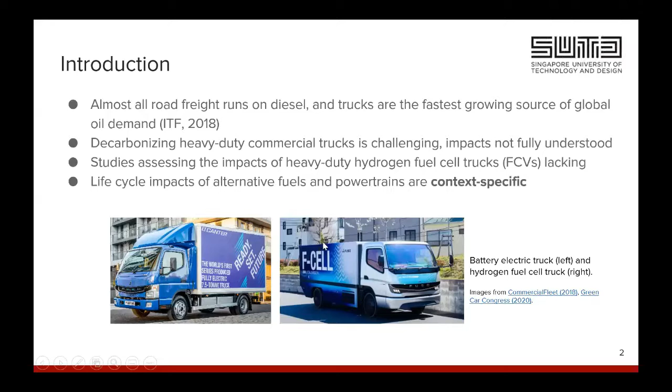I'm presenting this work, which is joint work with a colleague of mine, Lih Wei, and we wanted to look at the life cycle perspective of alternative powertrains for heavy-duty commercial vehicles, which are trucks. So we looked into a Singapore case study, and here's our results. Road freight runs mostly on diesel presently, and trucks are the fastest growing source of global oil demand. So we need to think about alternatives, and we also know that decarbonizing this group of vehicles would be more challenging. The impacts are not yet fully understood.

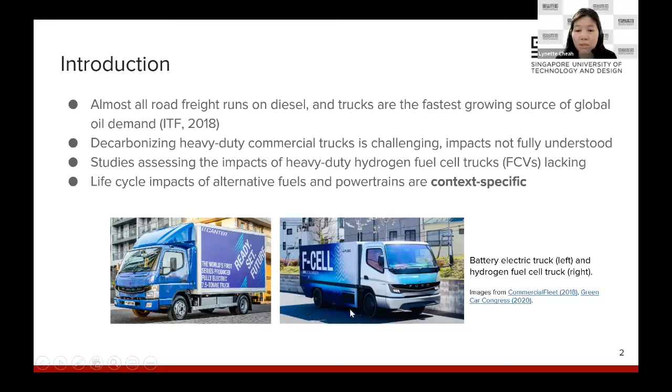So when we looked into the literature, we found a few studies, but those studying the impact of heavy-duty hydrogen fuel cell trucks seem to be lacking. And we also realized that in order to look at the life cycle impacts, every context differs a little bit. So that's why we focused on our case study of interest, which might be relevant in other cities as well. These images at the bottom show a battery electric truck on the left and a hydrogen fuel cell truck, which are some of the alternatives being considered now for these heavier vehicles.

So that's the burden associated with producing the fuel needed, be it diesel, electricity, or hydrogen. We'll be looking at the vehicle cycle, which concerns the embodied carbon in the materials used in the vehicles, assembling the vehicle, and then eventually using it, so the tank-to-wheel analysis. So this would have inputs if there's additional maintenance, or maybe battery replacements would also be accounted for in the

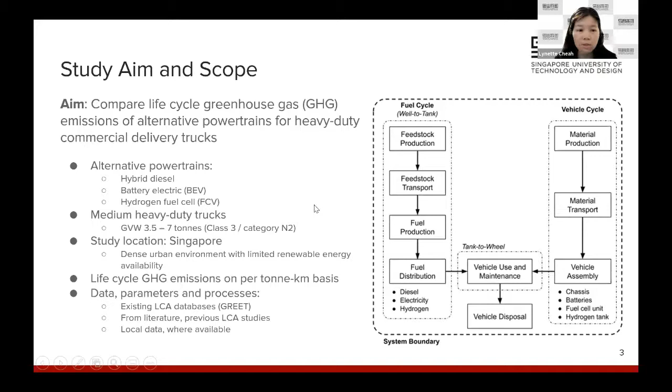vehicle use phase. The vehicle we're looking at, we call it a heavy goods vehicle in Singapore. I think it's more commonly known as a Class 3 vehicle in the US, or a Category N2 vehicle in the European Union. And we're looking at the city use of these sorts of trucks in a very dense urban environment. We'll be reporting the greenhouse gas emissions on a per ton kilometer basis. We'll use local data where available. If not, we'll be using existing lifecycle inventory databases like GREET or other available sources in the literature.

For the manufacturing and recycling, we use some of the emission factors available from the literature, and we account for key components like the vehicle body itself, the battery unit, fuel cell unit, or hydrogen tank. And then for replacements, there's some range of assumptions that we had to make. For the battery, we assume it lasts maybe 2,000 to 5,000 cycles, depending on the battery chemistry, the source of which is the California Air Resources Board. And the fuel cell units are going to last up to 19,000 hours.

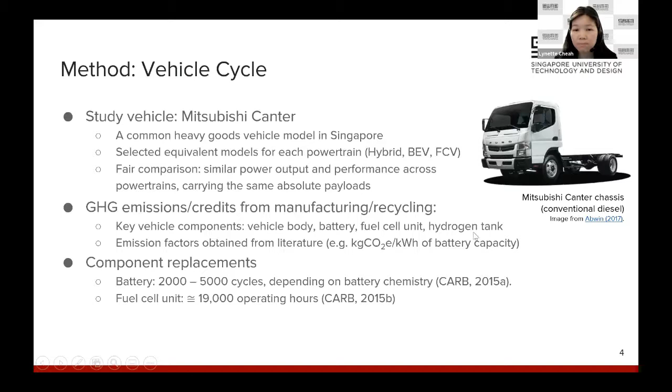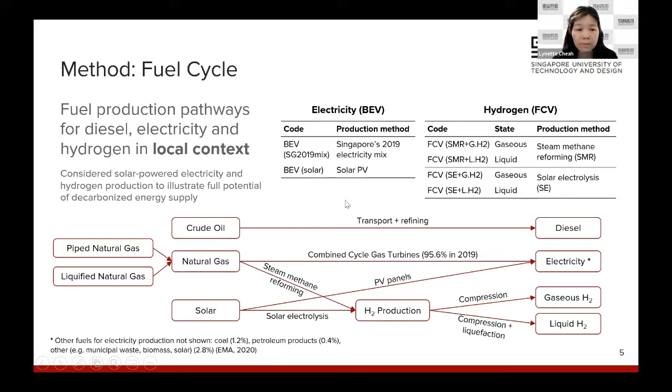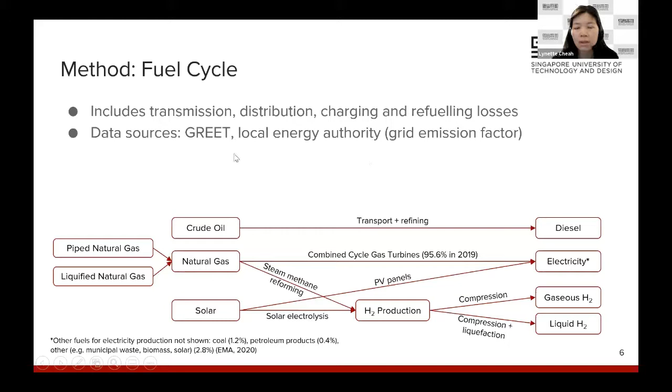Optimistically, if we could pursue solar, this pathway looks into the potential for renewable energy use to produce the hydrogen. For Singapore, in terms of renewable energy, solar holds the most prospect, so we've considered these potential pathways. Of course, in your city and in your context, you would consider different fuel pathways as well. So we would account for transmission, distribution, charging, and refueling losses. And where possible, again, we use local data sources, if not some of the pre-existing lifecycle inventory databases.

For the use phase, we had the privilege of tracking a few heavy-duty commercial trucks in Singapore, and we used that information to construct a local drive cycle. So again, if you are looking to evaluate alternatives for your context, it might be helpful to keep track of how trucks tend to be used in your context. We were able to reconstruct a synthetic drive cycle, in a sense, and use that to estimate the energy inputs required. So we have a model to estimate the power demand at the wheels based on the operating characteristics, basically this drive cycle.

And then we account for energy recovery systems available for hybrid powertrains, battery electric, as well as fuel cell vehicles. The energy consumption would be reported on a per ton kilometer basis. So this is the utility we get out of the truck, how much tonnage it moves over a certain distance. So megajoules per ton kilometer.

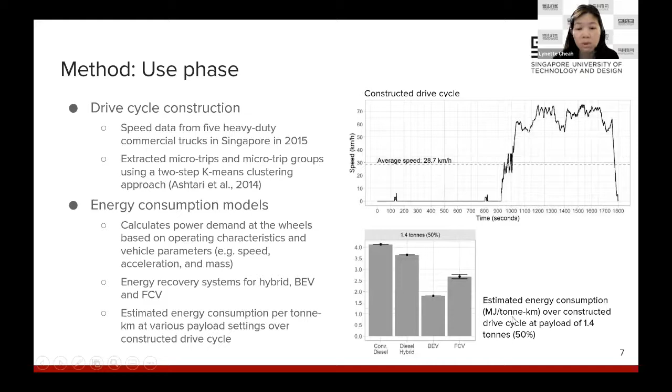We will also be able to account for what might be the average daily mileage of such a vehicle. We had a distribution of trucks that we were also tracking in Singapore. So trucks travel about 100 kilometers per day. And then the average lifetime of about 14 years was used to estimate a total lifetime mileage that we expect these vehicles to go through.

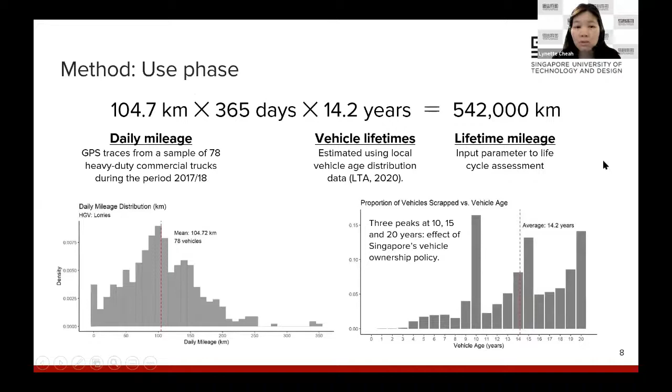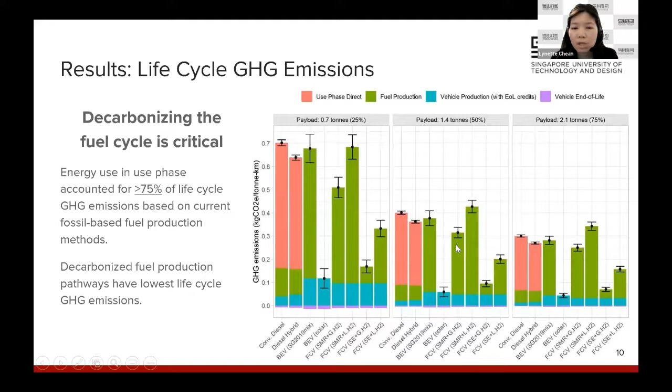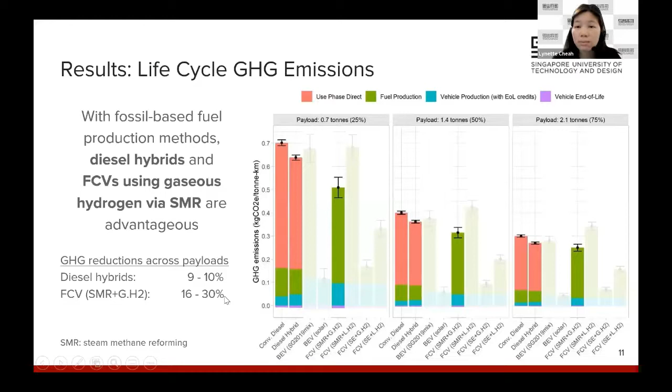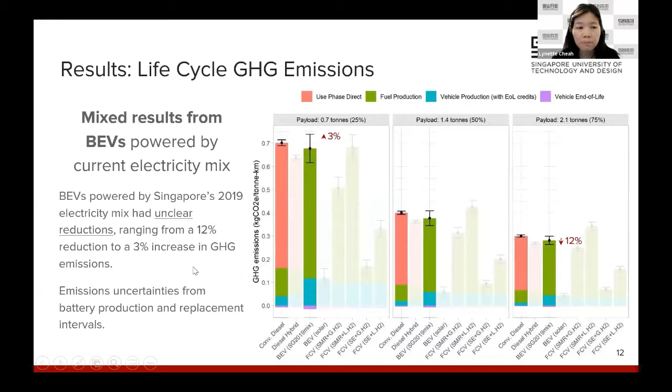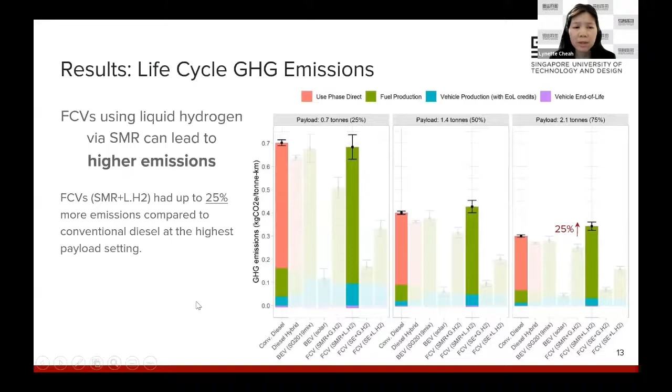Fuel cell vehicles using liquid hydrogen via steam methane reforming can potentially even lead to higher emissions. So not all the alternatives actually help reduce greenhouse gases on a life cycle basis. So again, we have to pay attention. This life cycle perspective is always very helpful to look at the upstream impacts.

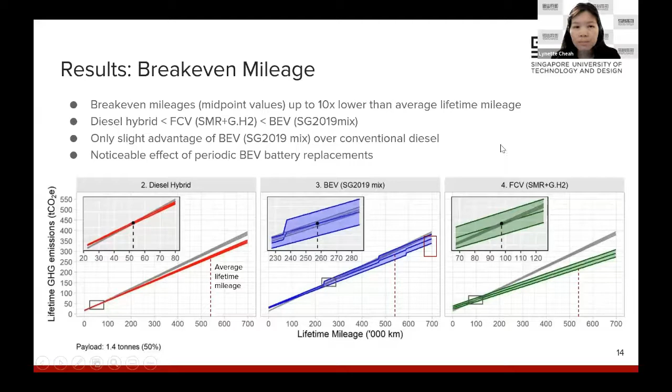So just to wrap up now with a few brief policy recommendations. I think decarbonizing the upstream fuel production is critical if we want to look at decarbonizing road freight. And then with limited renewable energy options, like in the case of Singapore and maybe other contexts as well, fuel cell vehicles using gaseous hydrogen and diesel hybrids are potential options.

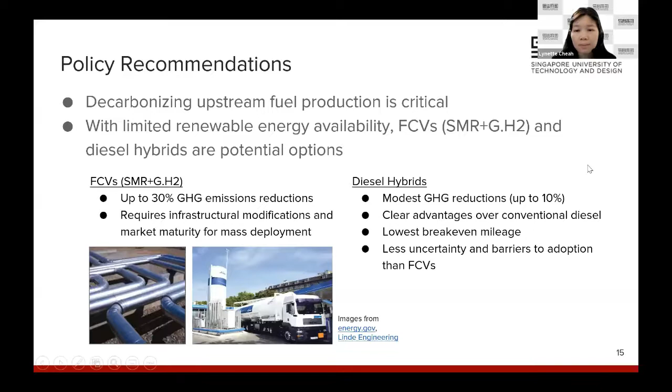And then I think many of these technologies are still in the very early stages of development, so we definitely need to keep considering trying them out in trials, local technology pilots, demonstrations with the research community or with the industry. And then I think that will help us again find out more about these alternatives and how feasible they can be.

For future work, we're not done yet with the work here, so we want to find out a little bit more. We want to account for maybe future developments in the energy sector if we were to decarbonize it or couple it with other technologies like carbon capture and storage. We want to account for the diversity of the ways these trucks are used in any context. So a construction vehicle is very different from a delivery vehicle, for example. So we want to account for different use cases and operational dynamics.

And then consider other environmental impact categories as well in our assessment. So far, we've only looked at the greenhouse gas emissions impact, but we could also look more into the local air pollution impacts and the resource availability questions associated with making these alternative vehicles. And then, of course, operators will be very keen to know more about the life cycle costs associated with these alternatives.

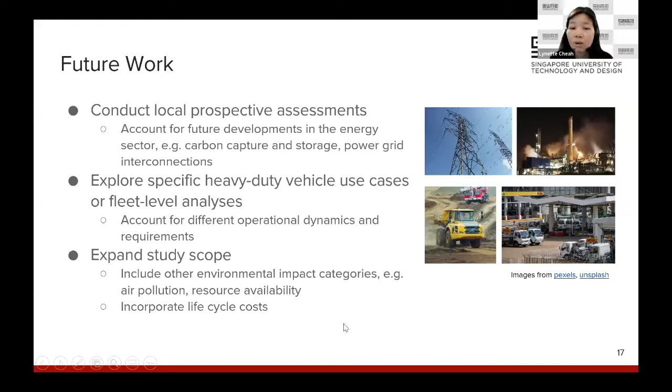And we have already a question from Paul Minette. The question is, do you include the manufacture of the solar panels in the battery electric vehicle solar case? Yes. I think we did account for the manufacturing of the solar panel as well. Okay, thank you very much.

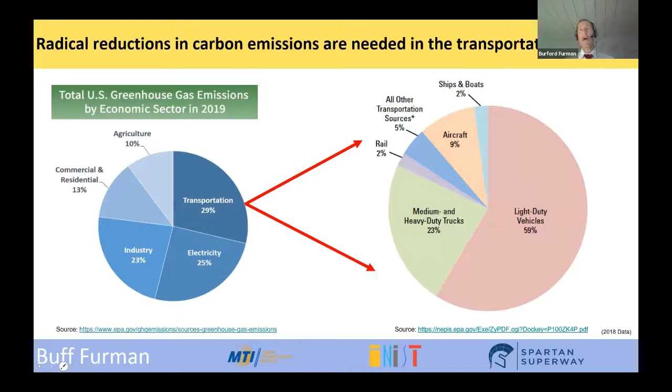So let me start with some of the bad news. At risk of preaching to the choir, this is the total greenhouse gas emissions in the US from 2019. And as you can see, the large share comes from transportation. When you break that down, the large share of that is due to light duty vehicles, which EPA classifies as passenger cars and light duty trucks.

Breaking that down further, you find that passenger cars make up the largest share of that, 70%, with light duty trucks about 30%. So we're, I think, justified to really focus on passenger cars in terms of trying to reduce greenhouse gases.

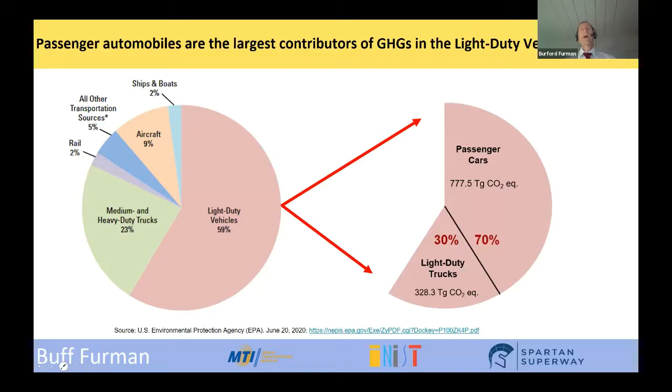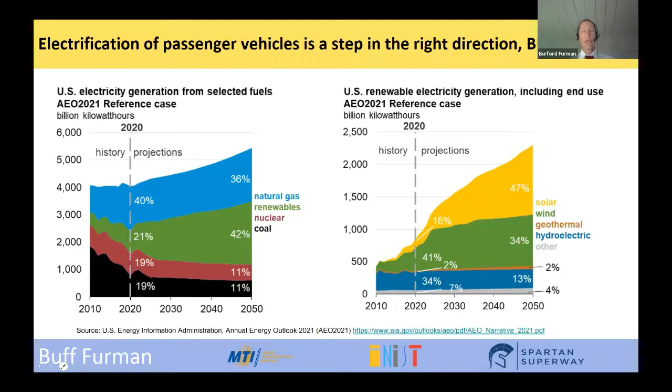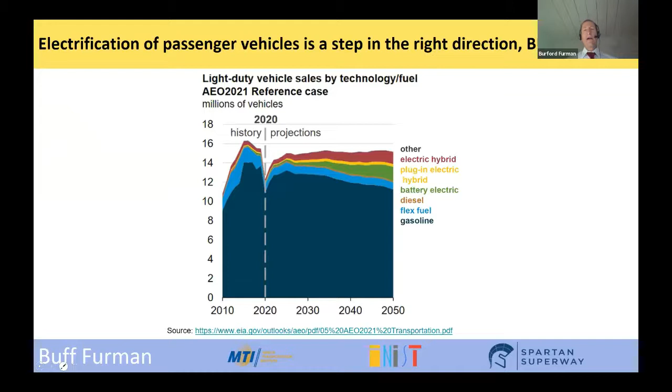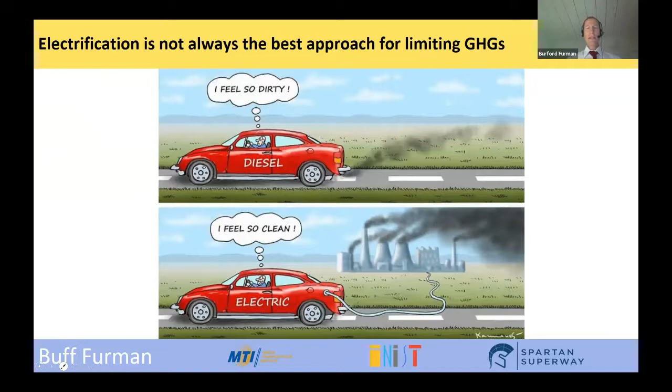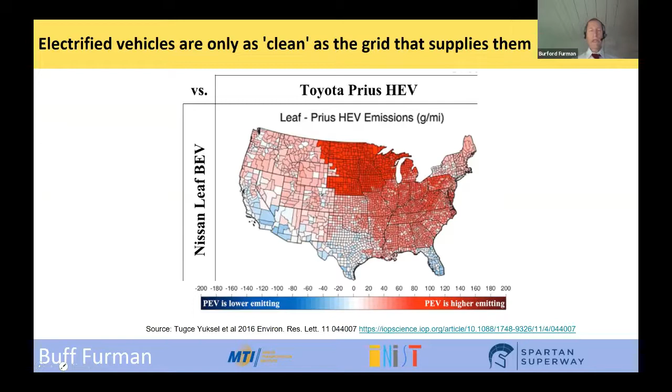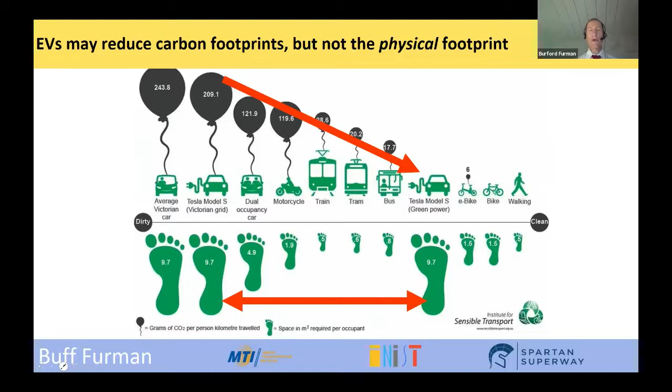So even though we're seeing reductions now, if you were able to drive, say, a Tesla purely powered by solar energy, you would still have a large physical footprint. And this is a problem in our urban areas due to the need for parking and space in the cities. Even with a battery electric vehicle, you're still going to have this kind of problem. The way we do transportation, since everything competes for the same space, this is almost inevitable.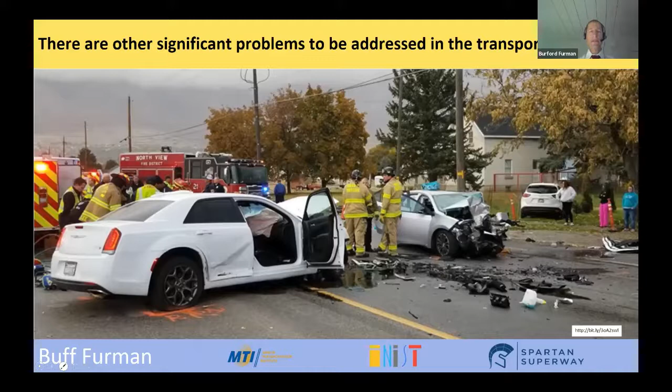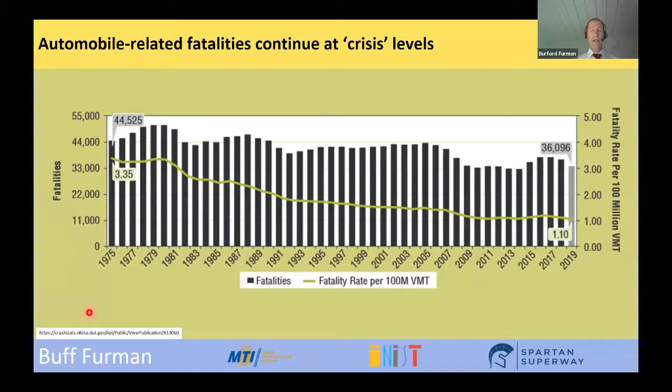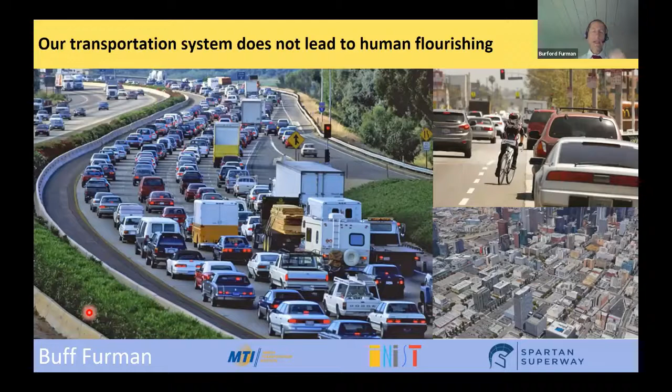And this is shown pretty strenuously here for US fatalities. Back many decades, it's really unconscionably high. And that's something that we have a problem with in the way we do urban transportation. So in summary, our transportation system really does not lead to human flourishing. So we need a more effective solution that can really attack greenhouse gases and some of these other problems.

So what I'd like to do now is hand it off to Ron Swenson to show you a better way. So Ron, you ready? Yes, thank you very much, Buff. And it's a pleasure to be here with you folks from around the world, from the comfort of my own home.

The unique part that we bring to the story, of course, besides the mechatronics, which Professor Furman and his students have been developing since we began this project together in 2012, is the addition of a canopy, which enables us to have 100% solar power in the system. So by elevating the system, our urban footprint is simply the columns that affect the street level.

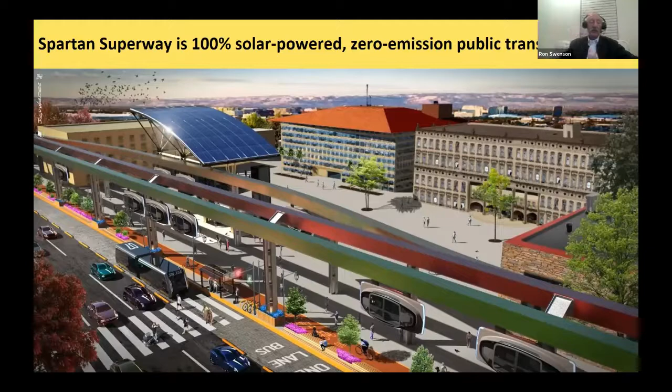And so unlike a corridor of a train system where you have to stop with everybody else at every station, in this case, every vehicle is an express vehicle between its origin and its destination. So moving on then, I want to tell you a little bit about the particulars.

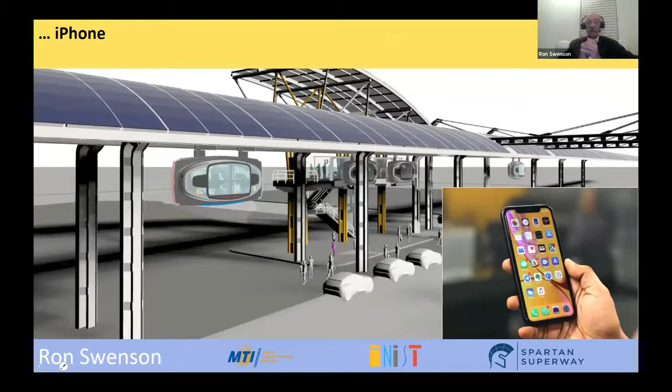Now, at San Jose State, the campus is split in half with an athletic program on the south end and the main campus being quite a distance. And even though it's only 1.5 kilometers, about 1 mile, nonetheless, it takes far too long for people to get between these two extremes. So we are proposing a system that we'll tell you a little more about later, but I want to just give you a feel for what this might look like at the various stations.

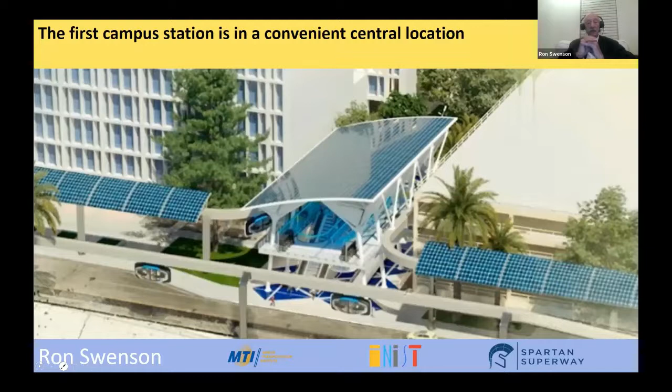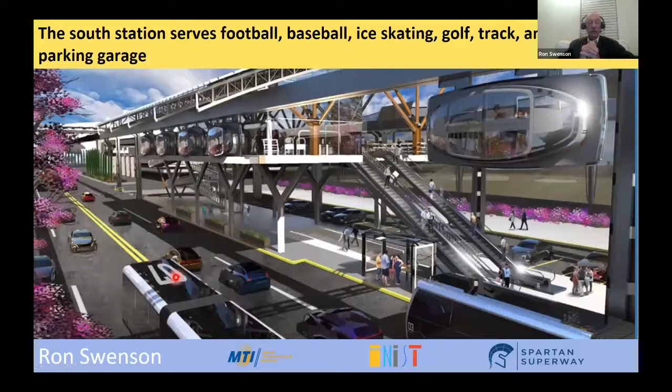Now, I want to pass this on to Jack Fogelquist, who will talk about how, having analyzed the amount of solar we can capture, just how far that can take us. Go ahead, Jack. Thanks a lot, Ron.

So as Ron mentioned, a 5-kilometer-long automated transit network has been proposed to connect the north and south campuses of San Jose State University. And the idea is that this system would replace the diesel shuttle bus service that currently connects the two campuses, called the SJSU Park and Ride.

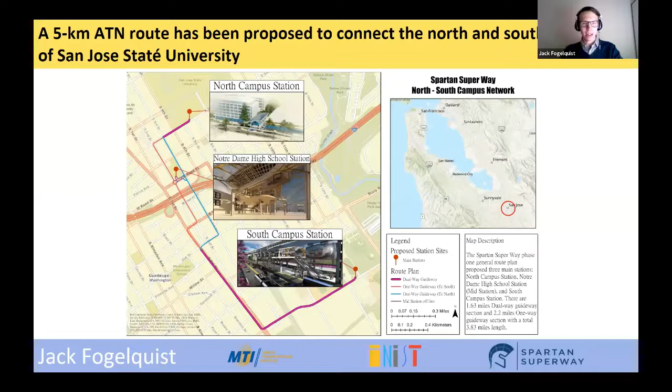While the proposed ATN satisfies many important criteria from an urban planning perspective, questions about the energy system arose. Like, is it feasible to power an automated transit network with solar energy? How many solar panels would be needed, and how much would it cost? Why use solar instead of electricity from the grid? And so our analysis here summarizes the findings from a feasibility study centered around these questions.

And so here we began by characterizing the energy demand of the ATN with urban mobility simulation tools called SUMO and SUMOPy. SUMOPy was developed by Professor Joerg Schweizer of the University of Bologna and is a graphical user interface for SUMO, the urban mobility simulation suite developed by DLR.

The proposed ATN was modeled with SUMO and configured with the ridership profiles shown on the left, which were derived from the SJSU Park and Ride data. An example simulation is shown on the right, in which virtual patrons board and alight ATN pod cars traveling through an offline station.

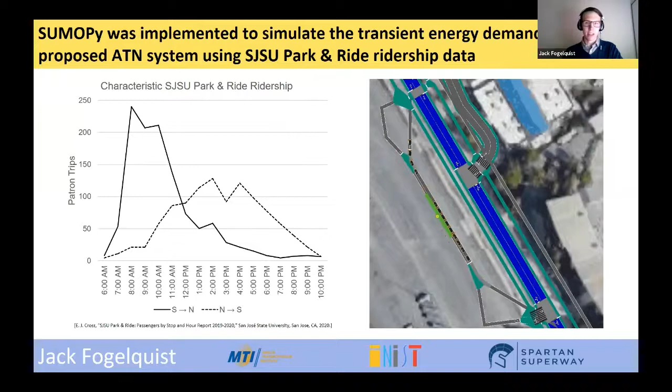After using SUMOPy to simulate the transient energy demand, a model was developed to simulate the performance of the complete energy system. This includes electricity generation from the solar photovoltaic canopy, energy storage in a bank of lithium-ion batteries, interactions with the electrical grid, and conversion losses and inefficiencies along the way.

It's important to note that the electrical grid serves as both an energy source and sink through which surplus solar electricity can be exported and demanded electricity can be imported. The simulation is performed for every hour of the year, and an example output is shown in the upper right for 2 arbitrary days in April.

Here, electrical power is plotted against time, with the yellow curve representing the solar power, the black curve representing the transit system demand, the green curve indicating the battery power, and the red indicating the grid power. The curves show that the surplus solar electricity is used to charge the batteries during the day, which are then discharged overnight to meet the demand of the transit system. And transient simulation like this allows us to parameterize the energy system, specifically the rated capacities of the solar and battery systems, to optimize performance.

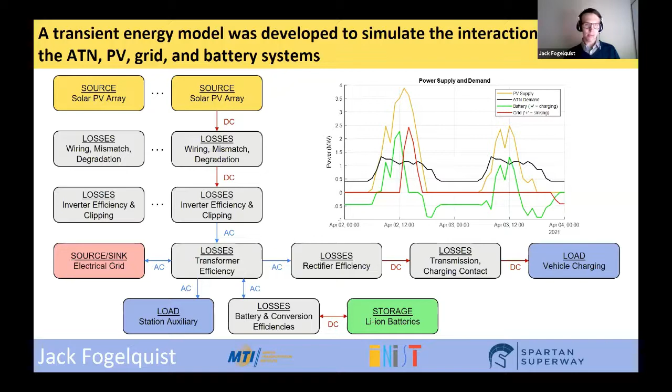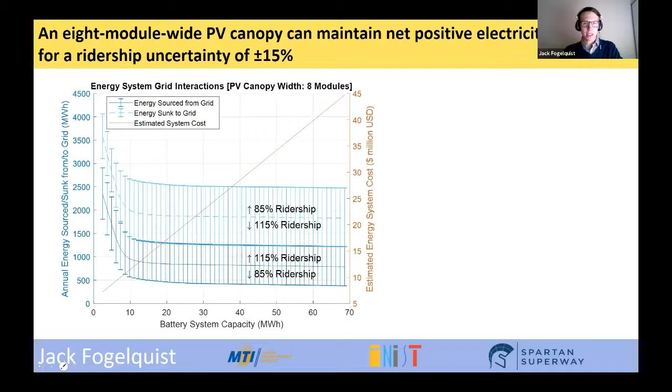So a solar canopy with 8 modules across its width was observed to be the most economical configuration, subject to the width constraints imposed by the surrounding trees and buildings that line the route. This plot summarizes the grid interactions for this configuration in function of the battery system capacity plotted on the horizontal axis. The light blue curve indicates the annual energy sunk to the grid. This is the surplus solar electricity that was generated when the batteries were fully charged.

And the dark blue curve indicates the annual energy sourced from the grid. And that's the electricity that our energy system needed to import in order to meet the transit system demand, typically on cloudy or rainy days. And we want this curve to be as low as possible because imported electricity is expensive and can have high carbon emissions associated with it. And the error bars here on these curves represent a ridership uncertainty of plus or minus 15%. And finally, the expected cost of the energy system is plotted in orange on the secondary axis based on benchmarks published by the National Renewable Energy Laboratory earlier this year.

And so, as we can see, the energy system exports more energy than it imports for every battery configuration. However, the battery system must be small in order to minimize costs. And so we found that the optimal battery capacity that minimizes both system cost and imported energy was observed to be 9.8 megawatt hours. For reference, the battery inverter unit shown on the right here has a 1 megawatt hour capacity and is about the size of 5 refrigerators set next to each other. So our proposed system would have 10 of these units distributed along the route.

After observing that the system is functionally feasible, we set out to evaluate the economic viability. So we wanted to compare the expense of building and operating a solar battery power plant versus simply purchasing electricity from the local utility company. And this was done by comparing the levelized cost of energy, according to this formulation from the US Department of Energy, which values generated electricity based on expenditures related to investment, operations and maintenance, and grid interactions. And so the results shown here indicate that it will cost 8% less to power the ATN with solar energy than with electricity purchased from the grid.

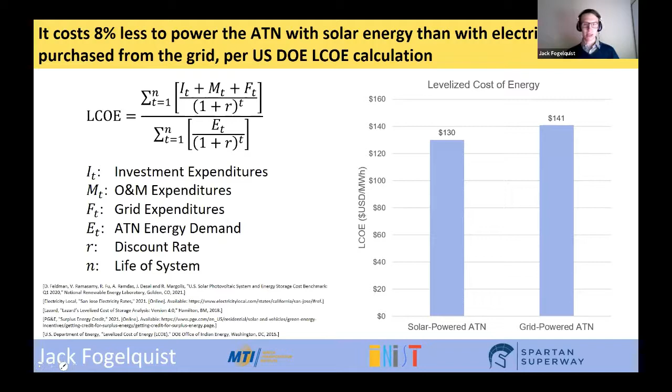In our final result, we compared the emissions of the solar-powered ATN with the grid-powered ATN and the SJSU Park and Ride. CO2 emissions are shown on the left, and particulate matter 2.5 emissions are shown on the right, with the red bars indicating positive emissions and the green bars indicating reductions. The solar-powered ATN was the only system to yield a net reduction of emissions due to the surplus of clean solar energy exported to the grid. The small positive emissions from the solar-powered ATN were the result of importing electricity from the fossil-fueled grid, though these emissions were doubly offset by the reductions.

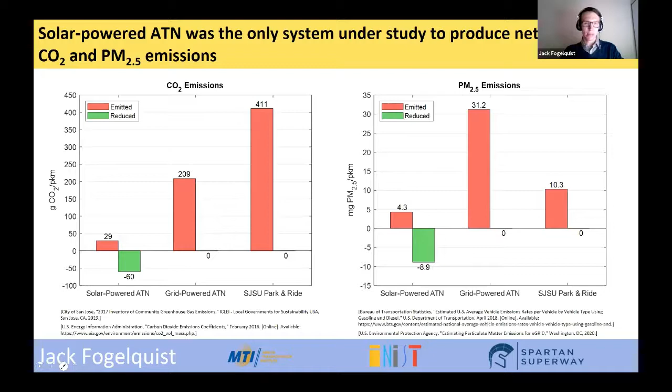And in sum, it is viable to power the proposed ATN with a PV system of 6.2 megawatts rated output, coupled with a lithium-ion battery system of 9.8 megawatt-hour capacity. To put this in perspective, the solar canopy would be 7 meters wide with a 1 megawatt-hour battery pack spaced every 500 meters along the route. And we determined that it was more economical to power the ATN with solar energy than electricity purchased from the utility company, as well as finding that the system would yield net negative CO2 and PM2.5 emissions.

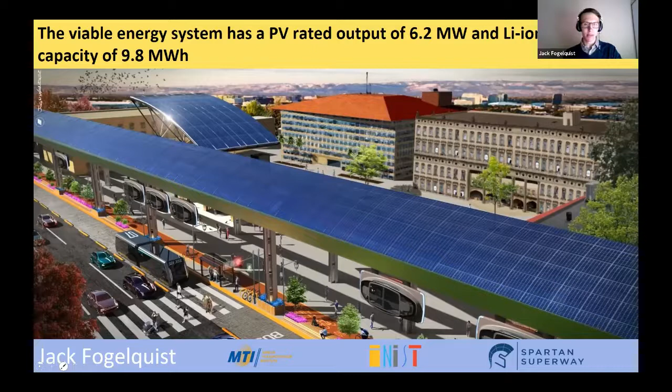And now we'll turn it back to Ron, who will address our recommendations and call for action.

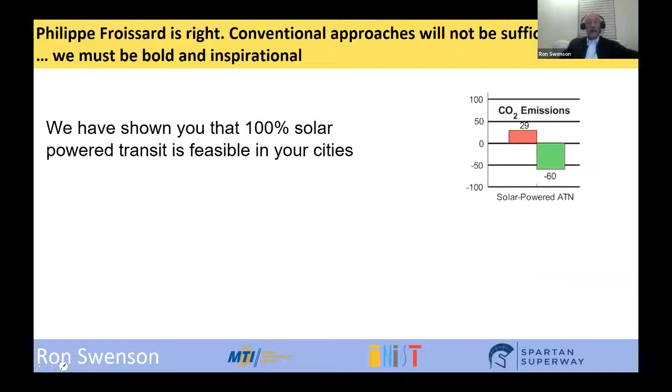Thank you, Jack. I just want to call your attention to a conference that was held a year and a half ago in Stockholm, where our moderator, Mr. Froissard, at Viable Cities said that conventional approaches will not be sufficient in mobilizing research and fostering innovation. We must be bold and inspirational. To that end, I want to say that we have now shown you that 100% solar powered transit is feasible in your cities. And that in turn brings us to point out that we have shown you how you can actually weave this solution into the urban fabric of your cities.

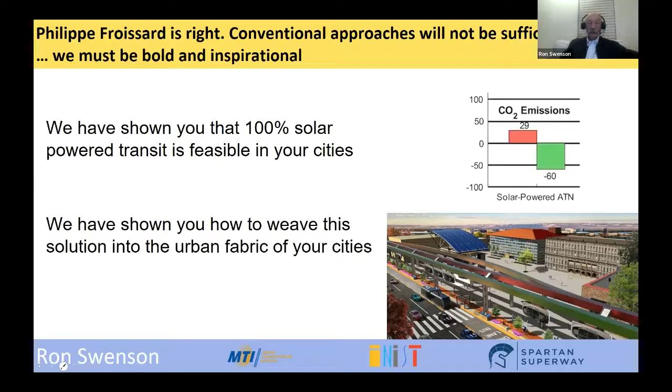That being said, we want to suggest that if you know anybody in your city who can deliver on this, by all means, go talk to them. There's no time to waste, and we're over here and you're over there, so go for it. Find those people and get busy. But if no one else has done it in your community, then we challenge you to challenge us. Please get a hold of us and make sure that we're walking the talk.

And so as a result of that, we have established colleagues around the world. We can tell you more. So we would encourage you to convene your cities, universities, and industries to join the Spartan Superway and come talk to us. And we left there a website that you can go to see our work and follow up in that fashion.

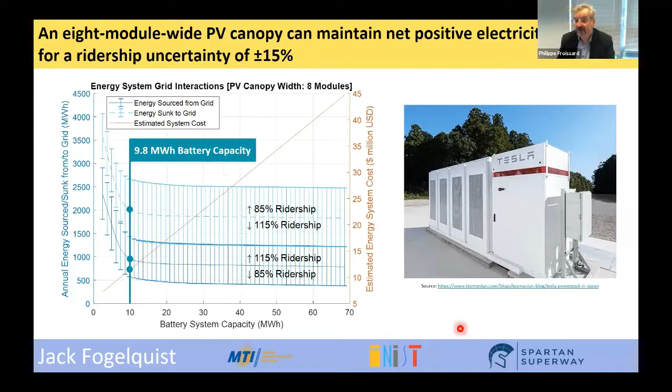Okay. So what I suggest is to keep the other questions to the last session, as I said. And I'm just looking at, yeah, there are quite many more questions that I will ask you to answer. But I'd like now to move to the third speaker of this session. And thank you again for the presentation that you made.

So the next speaker of this session comes from Newcastle University in the UK. Gustav Bösehans is a sustainable transport researcher with an environmental psychology background. His main research interests lie in shared electric mobility hubs, what's called e-hubs, sustainable urban design, and traveler segmentation. Gustav is working as a research associate on the EU-funded eHubs project, of which Newcastle University is a project partner. He will present to us today his work on predicting the intention to use different types of shared electric vehicles using a multiple linear regression approach. Gustav, the floor is yours.

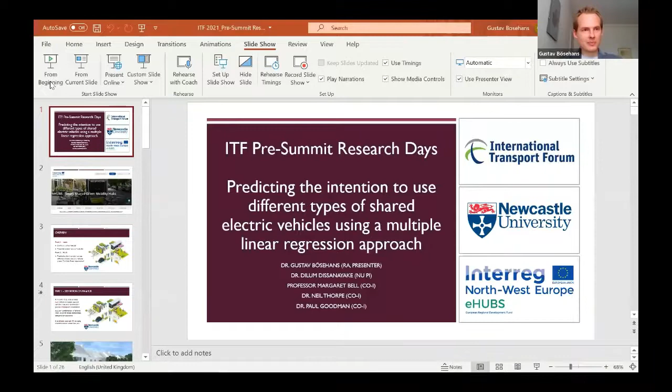Thank you very much. Yeah, it's nice to meet everyone, and it's a great opportunity to be able to present and share some of our research findings today. There we go. As Philippe has already said, I'm a research associate at Newcastle University and currently working on the eHubs project. And today I would like to share some preliminary findings with you.

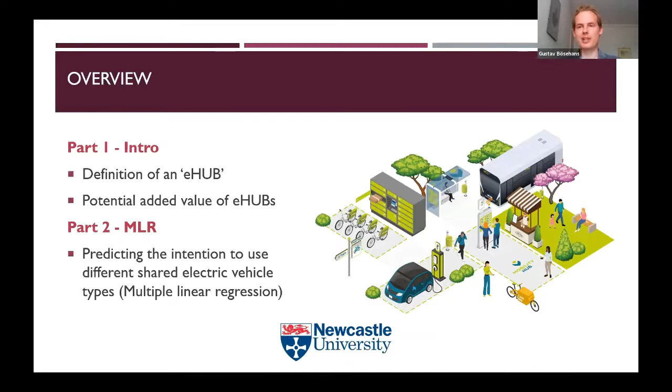Now we define an e-hub as a mobility hub that has at least two different shared electric vehicle types available. So this could be any combination of, for instance, shared electric bikes, cargo bikes, cars, or e-scooters. And we have seen in the previous two presentations that electrification on its own is not the solution. That's why mobility hubs are shared, so everyone has access to the vehicles at any one point in time. And of course, preferably mobility hubs also would have integration with public transport to enable first and last mile trips.

But that's not all there is to mobility hubs, because mobility hubs are not just about mobility, they can also be social workspaces. They can offer amenities such as lockers for storing items or for retrieving deliveries. They can also have charging points for electric vehicles, and they can also have other amenities such as maybe a small coffee stand or a small shop to go.

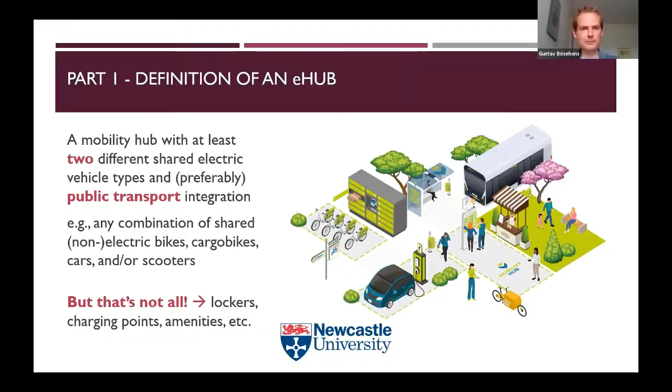Now you might wonder what is the added value of shared mobility hubs compared to traditional sharing schemes, because in the last few years we have seen dozens of shared mobility schemes about shared bicycles, e-scooters and cars popping up. So you might wonder, what is the point of hubs? Well, the most obvious point is that shared mobility hubs provide different types of vehicles that are suited to different situations and also to different target groups.

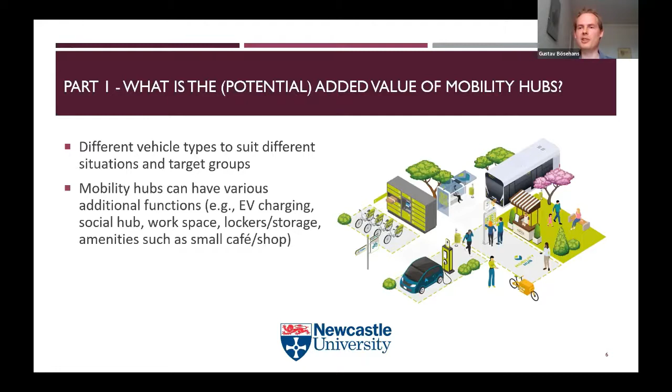For instance, if you just want to take a tour through the city, you might just want to pick an e-scooter, whereas if you want to do some groceries, you might opt for an e-cargo bike, or if you want to pick up maybe a friend from the airport, you pick an electric vehicle. And as I said earlier, hubs can have a lot of various different additional functions as well. So it's not just about mobility, but also about the social and communal aspects.

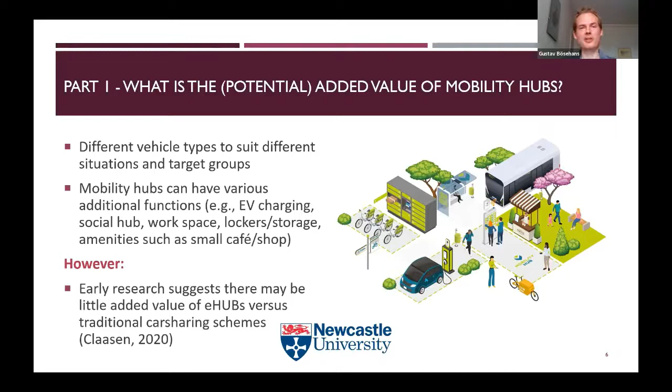However, there is some early research suggesting that there may be little added value of e-hubs over more traditional car sharing schemes. And that's also something that we are very interested in exploring. Now, for the main part, I will share with you some results of an analysis that we conducted in the last few months. And a primary question that we're interested in is what distinguishes the different vehicle types.

So in particular, we want to know, are the intentions to use different shared electric vehicle types predicted by the same or different variables? Or if we put that in other words, do the different shared electric vehicle types appeal to the same, or do they appeal to different audiences? And of course, by exploring this, we can also draw some conclusions about the added value of shared mobility hubs.

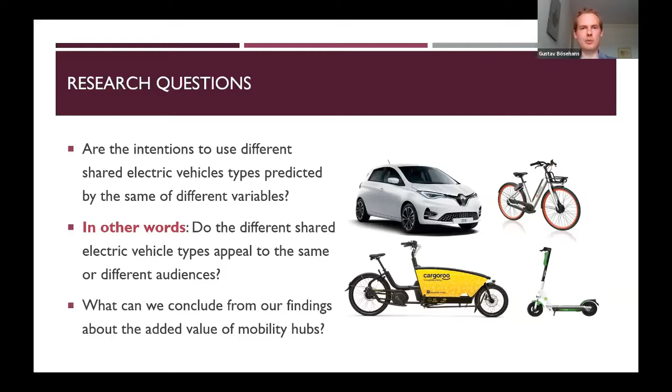Of course, there has already been a lot of research happening in this area. For instance, work by Reck and Axhausen suggests that micromobility users tend to be young, university-educated males in full-time employment, living in affluent households without children or cars. But of course, these things depend on the context. So in different cities, different countries, the user groups may, of course, vary.

We also know that shared mobility use is in part driven by environmental concerns, as is the case sometimes for e-scooters, and people are very attuned also to the trip efficiency and the individual convenience of using shared vehicles. We also know from the literature that e-bike sharing in particular has a tendency to substitute public transport trips, whereas cargo bike sharing is particularly effective in substituting trips by car. And last but not least, we know that perceiving benefits of shared mobility is an important predictor, especially in the use of car sharing as well.

Now, for the research that I will present now, we are using the data from a general population questionnaire that we administered as part of the eHubs project. And in total, we achieved about 2,500 usable responses across several countries. In the survey, we had a variety of measures. We had attitudinal measures, demographics, and of course, also information about people's travel behavior.

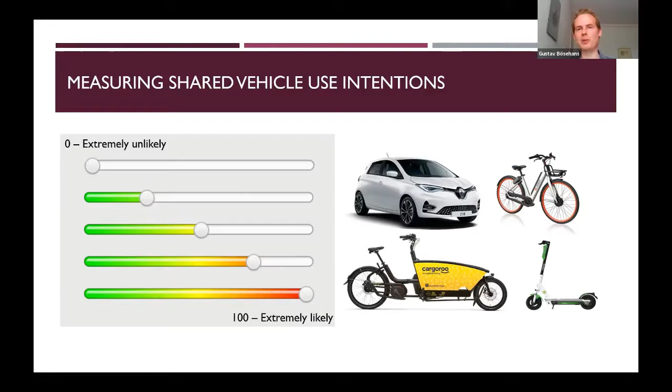Now, one of the most important measures in our survey was the intention to use different types of shared electric vehicle. And we measured intention using a continuous likelihood scale ranging from 0, extremely unlikely, to 100, extremely likely. And we opted for this very broad format because we wanted to get as much variance in responses as possible. Variance that is harder to get with 5 or 7 point likelihood scales where points in the data tend to overlap.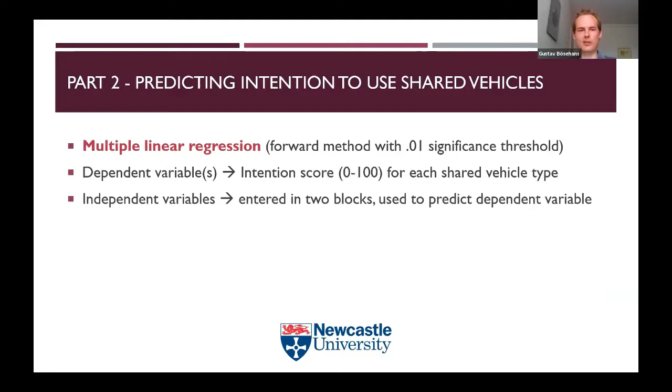Now, in terms of the analysis, we used a basic multiple linear regression approach using the forward method, and we used the 0.01 significance threshold because we wanted to focus only on those predictors that really significantly contribute to the variance in intention. We used the intention scores as dependent variables, and we entered the predictors in 2 separate blocks. In the first block, we had demographic variables, attitudinal factors, and commuter satisfaction.

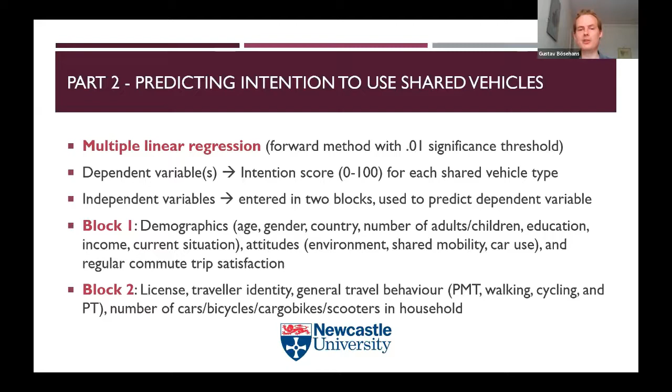Whereas in the second block, we had travel-related variables, including possession of driver's license, people's traveler identity, so whether they regard themselves as either a cyclist, walker, or car driver, for instance, information about people's general travel behavior, and also the number of vehicles available in the household.

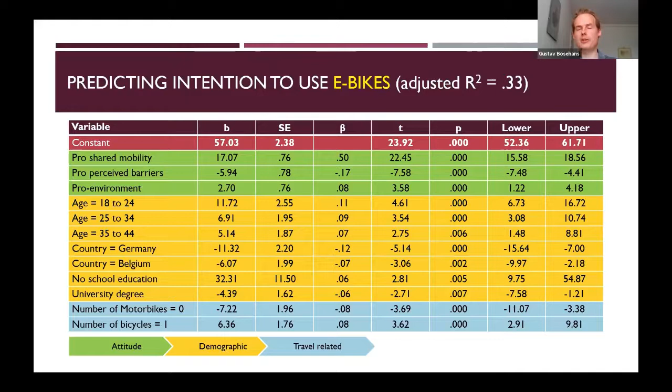We also found that a pro-environmental attitude increases the intention to use shared electric bicycles, whereas perceived barrier decreases the intention, which is quite intuitive. We also found that younger age groups generally are more interested in using shared electric bikes, which again is something we already know from the literature. So you can see that the age groups from 18 to 44 were more interested, and this effect was stronger the younger respondents were. And we also saw that people who already own a bicycle are more likely to want to try out e-bikes, or bicycles in this case.

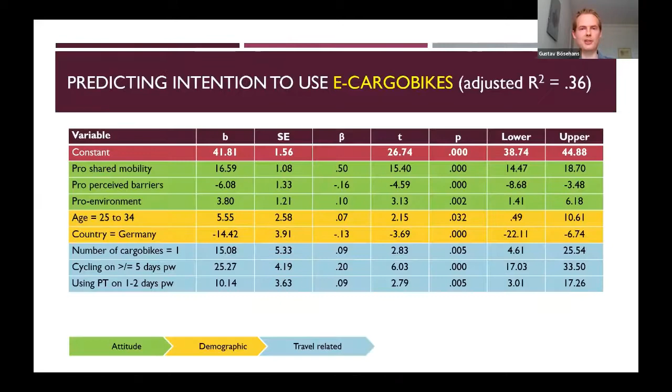We ran the same analysis for e-cargo bikes, and again, we found a similar pattern in attitudes, which was identical as in the case with e-bikes. We also again found an effect of age, although in this case it was only one age group which had a significant effect. And again, people who already own a cargo bike expressed greater interest. Interestingly, we also found that frequent cyclists, so people who cycle on 5 days a week or more, expressed a much greater interest in using shared cargo bikes. And the same was also true of regular public transport users, so people who use public transport on 1 or 2 days per week.

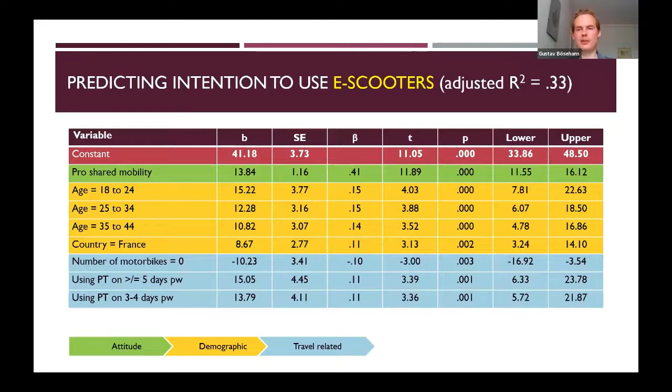For e-scooters, again, the positive attitude was the strongest predictor. However, we did not find that the pro-environmental attitude or perceived barriers had any effect on people's intention. As you might expect, young people were more keen to use e-scooters, and it was the same pattern as with e-bikes, meaning that the younger respondents were, the greater their intention to use e-scooters. Also, we found that frequent public transport users, so people who use public transport on at least 3 to 4 days per week, expressed a much greater intention to use e-scooters.

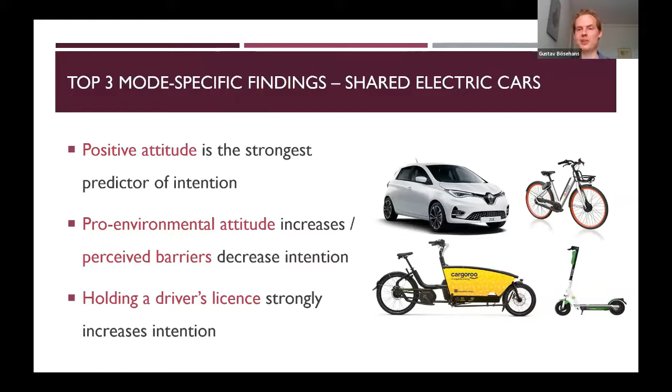And finally, we also looked at the predictors of the intention to use electric cars. And in terms of attitude, again, we found the same pattern as for electric bikes and cargo bikes. And we also found that holding a driver's license increases intention, which is plausible, of course, because if you don't have a license, you can't drive a vehicle.

So before concluding, I'm just going to sum up some general conclusions from this analysis. Overall, we did not observe any differences in intention between genders. We found that positive attitude is by far the strongest predictor of the intention to use any of the shared electric vehicle types. We also saw that with the exception of e-scooters, holding a positive pro-environmental attitude increases the intention to use vehicles, whereas perceived barriers decrease intention.

And in the case of e-scooters and e-bikes, again, we found that young adults, that is those between 18 to 44, express a greater intention to use vehicles, whereas for cargo bikes, this was only respondents between 25 and 34 years. And last but not least, there were also some smaller differences that I didn't talk about now, but we found in general that Germans were the least fond of shared mobility options. So I'm German as well, so I can understand a bit why that is, except for the case of e-scooters.

Yeah, and to sum up with some conclusions and recommendations. So we did find that different types of shared electric vehicles do appear to appeal to different audiences. We found, for instance, that shared electric bikes and e-scooters are particularly attractive to younger respondents. We found that e-cargo bikes are particularly attractive to current cyclists, which overall suggests that there is added value of e-hubs because they can be used by different target groups and for different situations. We also saw that electric cars appeared as a relatively neutral mode because we didn't see any differences in terms of age groups or gender, which suggests that this is a mode that can be used by everyone.

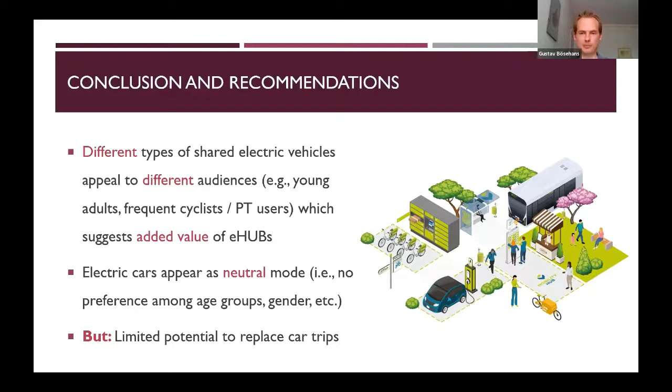However, it should also be said that there is limited potential of shared mobility hubs to replace trips by car. Because one of the main objectives that we have in the sharing economy is we want to get people out of their cars. But as our findings show, especially in the case of e-scooters, there's always the potential that those modes might replace trips that are already being made using sustainable modes. So that's one thing that we should keep in mind.

Regarding next steps, we also have stated preferences data, which we collected from the two biggest partner cities, Amsterdam and Manchester. So we're currently analyzing this data to provide more insight into people's decision-making regarding shared mobility options. And we will also be launching a second questionnaire focused on the users of mobility hubs, with the specific aim to investigate mode shift and also explore the desirability of various mobility hub aspects.